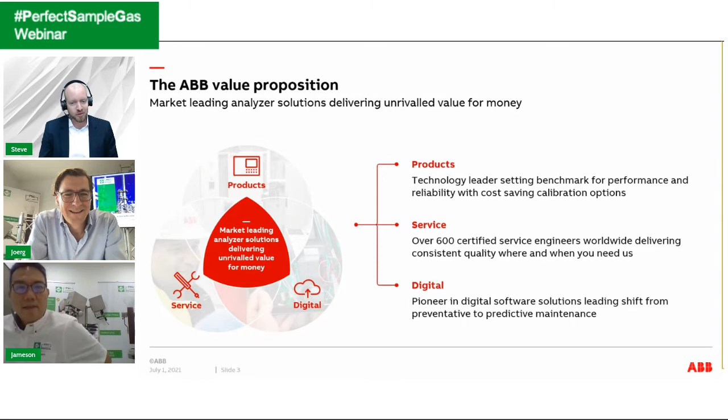But today we're going to focus more on the products and then show you a little bit on the digital solutions. And I think we've got a demonstration for you as well. So I'm really looking forward to share that with you. Let me take you through some of the portfolio here. So obviously from your side, you would look at an application and you'd say, okay, we need to measure these components. So we look at that, and we then take a sort of shopping cart of different measuring principles to match that up with your application.

And we have the benefit that we can pull from a very wide portfolio of all the different measuring principles that you can see. We also have GCs that are not mentioned here as well. That's one way of looking at the application. The other way that you can look at it is to say which analyzer modules are needed to suit the different applications. And if I look at our continuous gas analyzer series, you can see that this goes back many years, back to the 1920s.

So the first thermal conductivity based analyzer, the Caldos, was invented by Hartmann and Braun years and years ago for combustion processes. The Uras was actually developed by BASF here in Germany, and it was licensed to Hartmann and Braun back in the 30s, and we productized that and started selling it commercially in the 50s, and that's still our biggest selling product. It's a very well-known name in the industry. And then the other measuring principles you can see there as well: paramagnetic oxygen, you'll see a little bit on that later on, flame ionization, UV, electrochemical, zirconia. And so that's really for us the foundation for all of our continuous gas analyzers.

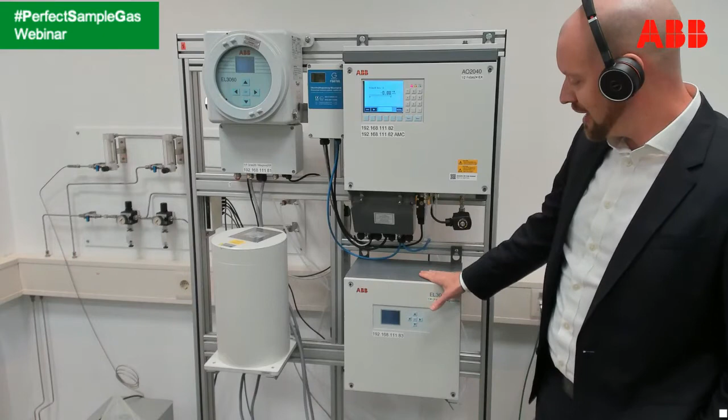Yeah. Interesting. Okay. And then the other one here is the EL3040. I'll just very quickly open that box so that you can see. So this is for general purpose, but very compact. This is the Uras 26 photometer, and then you also have under here a paramagnetic oxygen detector, so that shows you the combination of the two.

And then again, the same electronics, but underneath here you have a connection box which allows this to go into an IP65 environment. So you could install this outside. It's a stainless steel box, very robust, and that often for customers is very useful.

Yeah, good. Sounds interesting. I'm going to make my way back over there. See you in just a second. Okay. Wow. Hopefully he will make it. Oh yeah, that's great. Impressive. There he's back. There you go.

So, Steve, let me ask you. These are new products you are releasing now. Do you also see a trend that there are more hazardous area measurements? We saw this in our product development. We released this new ATEX probe. And it's a little bit the feeling that the measurements in hazardous areas are growing. I think in general, yes.

So maybe historically you could move the analyzer systems into a safe area, but then you compromise on the speed of the measurement. So more and more we're seeing the devices moving closer to the measuring point, and there you obviously get more into the hazardous areas, zone 2, zone 1, and that's why there is increasing demand. But I think there's also obviously a growing safety focus. And then there's more need to control the processes as well. So that's another reason why you would see an increase in demand.

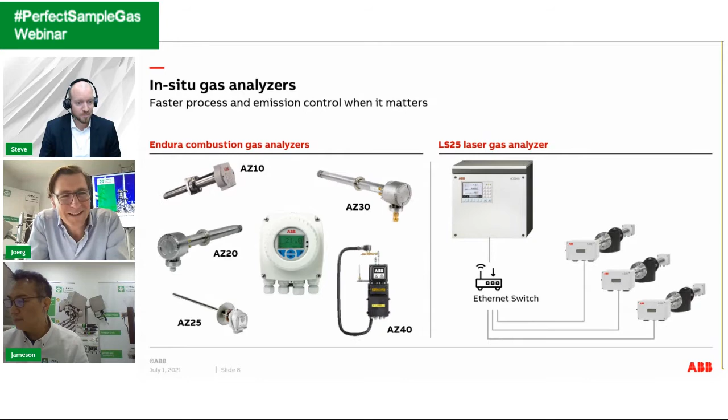Good. Then I would move on to newest developments. And here we have a couple of things to talk about. The first one is, you asked me in the preparation what kind of innovations are taking place in measuring technologies. And here I would share the example of our Magnos 28. It's a fairly new product. We launched it in 2016, and it's using the well-known paramagnetic principle, measuring oxygen. This measuring principle has stayed unchanged for 60 or 70 years.

And we said, come on, we need to move this to the 21st century. So our vision for the Magnos 28 was to replace this glass and all of the circuitry, there's a mirror on there as well, but also then to automate the manufacturing. So that micro wing is positioned on the wire. It's bonded to the wire, and then there are these little hooks on the side that it's also bonded to. And that then is the complete sensor. I'm not sure how well you can see this. That is the sensor in a little plexiglass model.

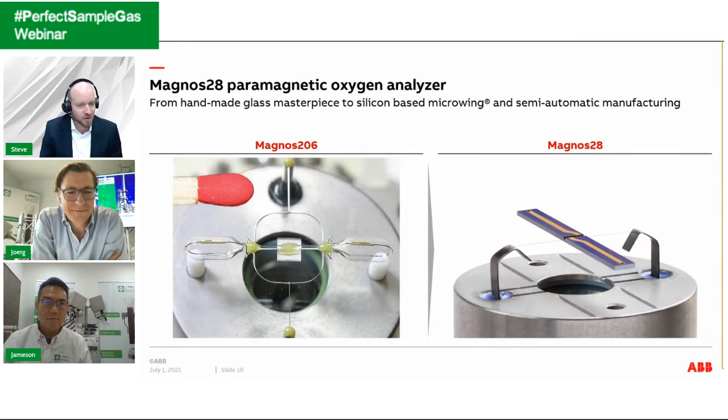But we're really excited about that, and the reason it's so important is because every single sensor is the same, which means that when you get into very critical applications, very low concentrations or high concentrations, you get much better repeatability and precision on the measurement. Okay, interesting. Good. So that's the Magnos 28. I'll keep moving for the sake of time.

The other area that you asked me to talk about was emissions and what's happening in terms of emission limit values in different industries. And I think the one that's most prominent is the BATC for waste incineration. This will come into law effectively in 2023, lowering the emission limit values for all waste incinerators or waste burning processes. So it could also apply to the cement industry, for example, if they're burning alternative fuels.

of the measuring components. And the good news there is that ABB has already tested one of our ACF 5000 systems on a plant in Germany, in Ulm, and passed the QAL 2 evaluation with these lower emission limit values. We're very proud of that, and it shows that it is possible to measure down at those limits. The next step, of course, would be to certify the system for those limits, and that's something that we're working on.

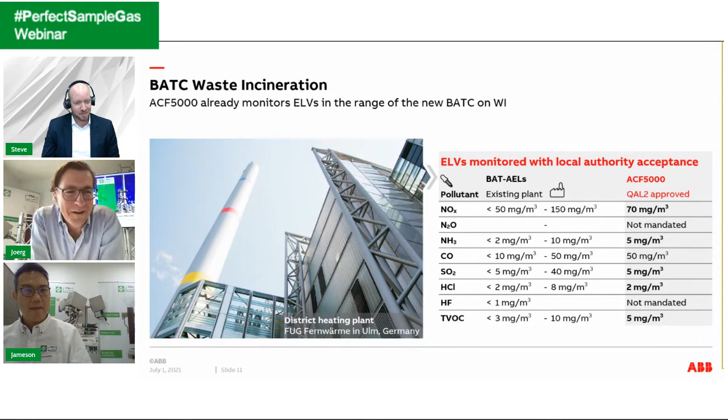So the last one in this section would be a quick intro to the digital offering. I'm going to do a demonstration in a minute for the dynamic QR codes, so I won't explain those in too much detail. Really what we've got here is the ability to easily transfer all the relevant diagnostic information manually.

But like I said, you'll see that in just a second. So Simon is here getting ready with the demonstration. The next one here is condition monitoring. So that takes the same diagnostic information and brings continuous monitoring to it. So we continuously track all of these different parameters and generate health check reports for our customers so that they can keep up with the health of their system.

And particularly in these lockdown periods, remote insights has been extremely useful. So remote support is quite common nowadays, being able to dial into the system and see what the customer's seeing, but you couldn't physically see the plant, you couldn't physically see the system, so you're a little bit limited. So what this does, this is a two-way video app, which allows us to sit in our factory or even at home, it doesn't matter, with the plant.

So they would carry a smartphone or a tablet or maybe even a headset, look at the system. We see exactly what they see, and then we can overlay instructions to them and talk through those instructions as they're working through it. So that's been really, really useful. We were quite lucky, I would say, that we had that solution about ready before the first lockdowns came.

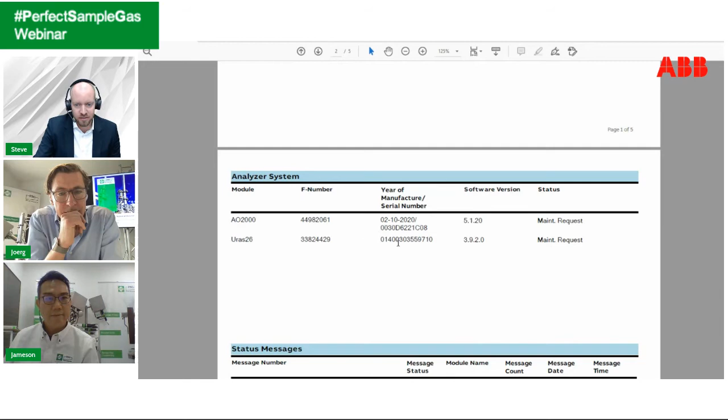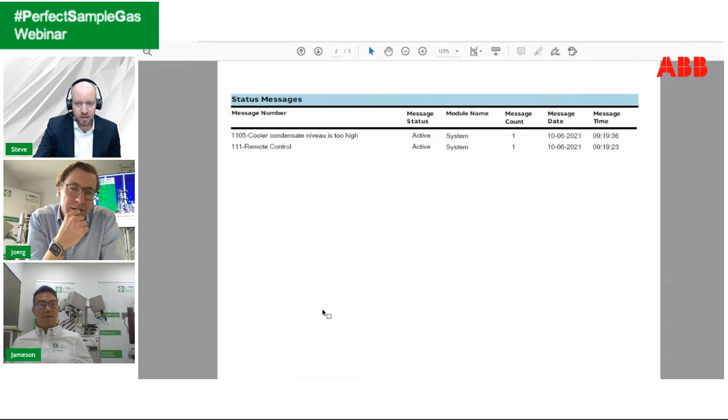It tells us that we have an AO2000 system with a Uras26 analyzer with the different software versions. You see there, for example, that the cooler condensate level is too high. So that comes from one of the status signals. It shows that we're in remote control status. You've got all the different I/O modules, the number of I/O modules. You've got the cooler temperature here, which is very useful.

Yeah. This is so interesting, especially the information from the conditioning system. I noticed now in China, there are regions where the authorities request not just the emission value from the system, but also information about the sample handling system. And it's interesting to see that this is logged there. It's very valid, very important information, right? It's hugely important, and for years we've had the approach that we need to have the data from the sample handling as well.

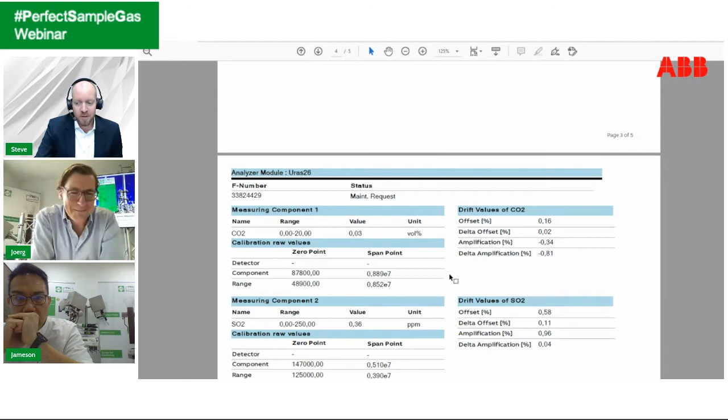So we have this CAN bus network that we build into all of the analyzer systems that takes the signals from the sample handling components into the analyzer. And that's how we can get all this diagnostic information through the QR code from the display itself. Oh my gosh, yeah. I think we have to look at the time a little bit, but it's just super exciting to see.

Yeah, so you can see with one shot, you've got all the relevant diagnostic information, and that really speeds up the whole fault finding, troubleshooting process. And even if you don't have a smartphone, you can take a picture with anything and just send us the raw picture. That also works. Then we can decode it on our end. So this is hugely exciting.

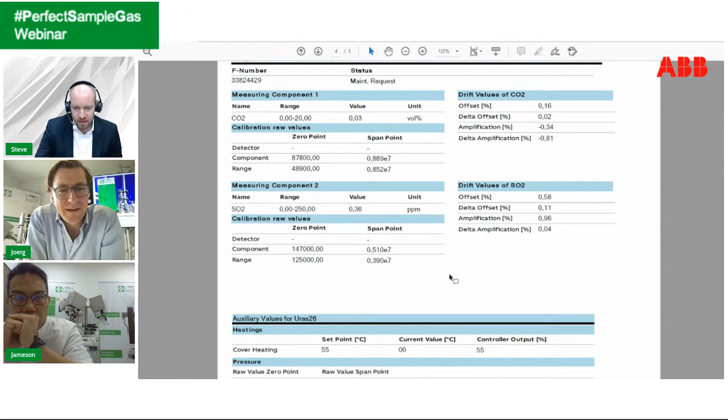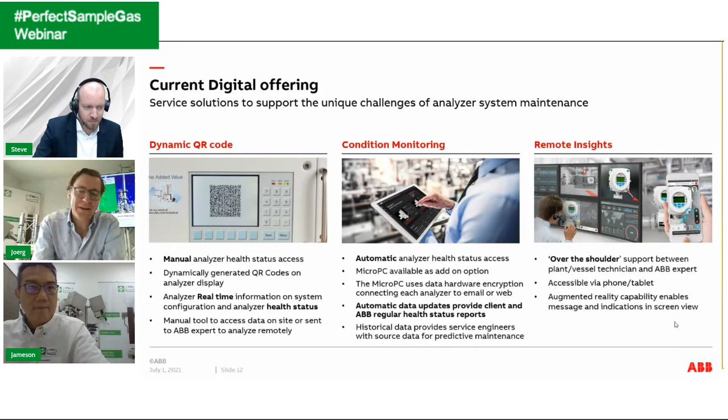What I would do now is come back to the presentation. And like you said, we need to be aware of the time here. And I would like to see you all as well. Good. It's always super interesting. When you jump into one topic, you think, wow, we could talk just one hour about this, but yeah, okay. One hour is quite tight. It's a lot to cover, I know that.

So let's move to sample handling, which I know is a topic close to your heart, and also for the audience here. So I'll give you a bit of an insight into how ABB looks at sample handling. This is a typical cold-dry extractive system. Not sure if you can see my mouse. So the probe, the filter unit, the heated sample line, then you come into a valve or valves for calibration, the cooler, which is a key component of the system, with the peristaltic pump for draining that moisture off.

Maybe an acid filter here if you have any aerosols that are getting through the system. That's an extra protection. Flow meter and a pump for transporting that gas, and then the final protection before the analyzer is a condensate monitor. And we quite often put another additional filter on before the analyzer.

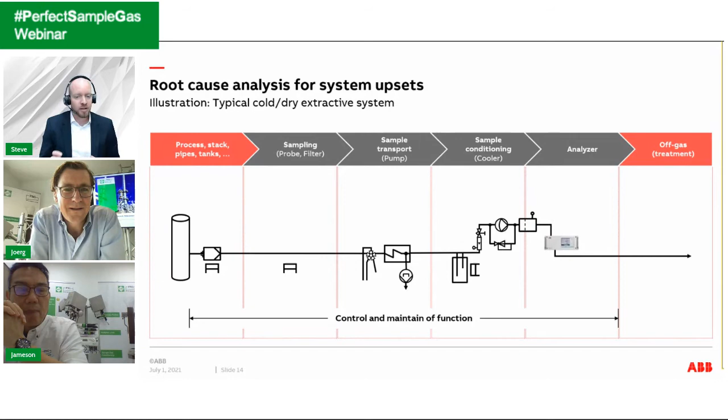What's really interesting here is we did a study a number of years ago looking into the typical failures of a cold-dry extractive system. We spoke to a lot of customers who helped us to gather data on that. And we learned 70% of all the upsets in the analyzer system are coming from the sample handling system. Of course, that doesn't mean that these components are not reliable and keep failing. It's not that at all. It's because the system is not designed correctly from the beginning, or the maintenance is not performed correctly. So that's important to mention.

And then when it comes to the analyzer, go ahead, Jörg. No, really, Steve, that's great to have this number here. I remember I saw this the first time, I think in India, when your colleague did a presentation and he shared these numbers, and I was really, wow.

This really outlines the relevancy, right? And I think, thank you for sharing this. It's interesting. Yeah, and then on the analyzer themselves, 25% of the failures would come from the detector. So that could be optical components, it could be contamination in the cell. And then only 5% of the failures that you typically see are to do with the electronics. It's really important to keep that in mind, and then also take seriously the design of the overall solution.

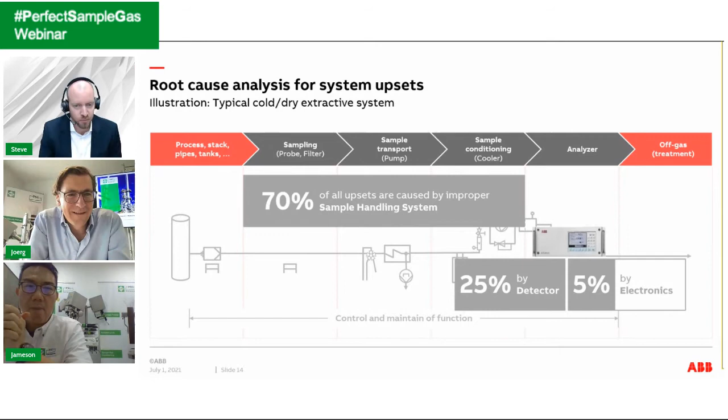Right, yeah. And for this reason, we also at ABB take it one step further in that we offer a pretty complete lineup of sample handling components. So on the probes, we have unheated probes, different grades of steel. We have a ceramic version as well. The heated probe, if you need to make sure that you're transporting that gas in the same condition. That's the probe 42. We have a number of filter units. Actually, I want to show you one of those in a minute, briefly.

Different types of heated sample line with self-regulated fixed resistor heating, cooler feed unit, thermoelectric type coolers, and then we also have the SCCS, which is a Peltier cooler, but a fully contained conditioning unit. And then on top of that, we have NOx converters, a utility unit for power distribution, and a number of other accessories.

Yeah, Steve, let me ask you. That's what you said in the slide before. You said it's not because of the reliability of the components, but very often, and I think, Jameson, this is something you must celebrate, because that's what you always say. You say you cannot copy and paste a system. If a system works fine in this application, you might need to choose other components, right? So, Steve, is that the reason why you have a selection of different types here?

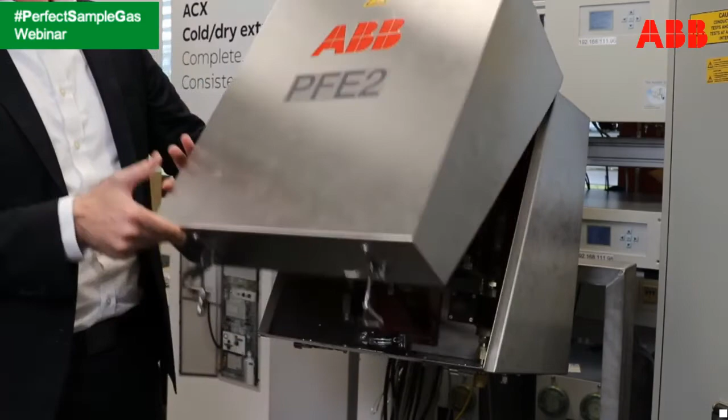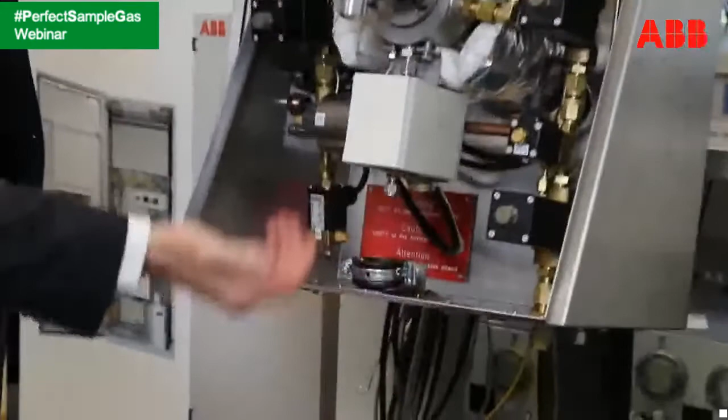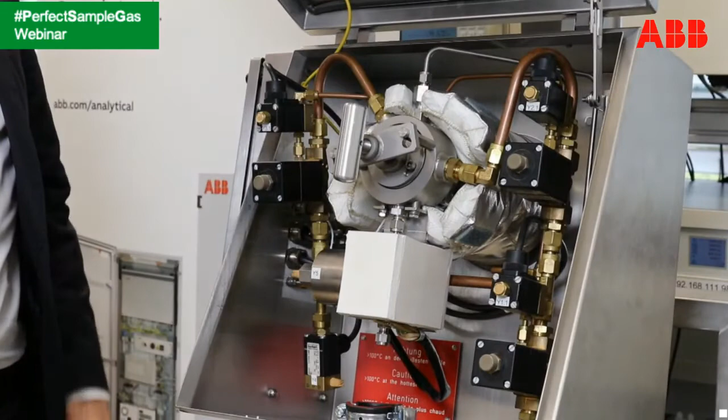So this is the inside. You can see a big heavy duty stainless steel box. The sample line comes in from underneath and connects to this valve here, coming into the filter unit. I won't demonstrate that now, but it's very easy to turn this and pull the filter element out for cleaning or for replacement. And then what you have around here is the back purging system.

So very heavy duty pipes, which means you have a lot of power there for the purging, and you can purge from the inside and also the outside of the filter to make sure that it's really clean. I won't say too much more about that. If you guys would like to comment, feel free, but I'll make my way back to the other screen.

Yeah, I think it's just very nice to see. There are some things we heard from you now which we always say. It's important, especially the probe and the primary filter unit, because it seems like the philosophy is a little bit similar: everything you don't need in your sample handling system remains outside, with very efficient filtration and also low maintenance, which is what I understood from the back purging. And I think it's interesting to see.

Absolutely, and we like this concept very much with the heavy duty back purging. We don't see any other solution out there that's quite as robust and suitable for those challenging applications. But at the same time, a little bit comparable to the concept of Advance Optima and EasyLine, you also have different options there, right?

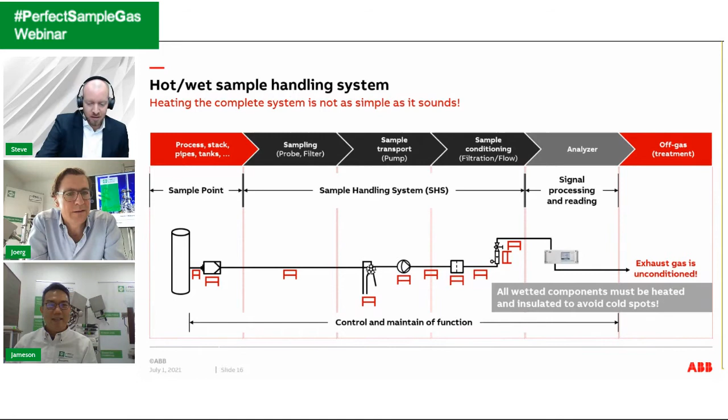Steve? Exactly. So the keys for designing the system are, of course, making sure the temperature is maintained. But the art form, if you like, is to limit the number of connections between the different components of the system, make sure the distances between those components are minimized, and take a lot of care about any parts in the system that are going to wear, because you're at a much higher temperature. So diaphragms and O-rings, you need to carefully select the materials there.

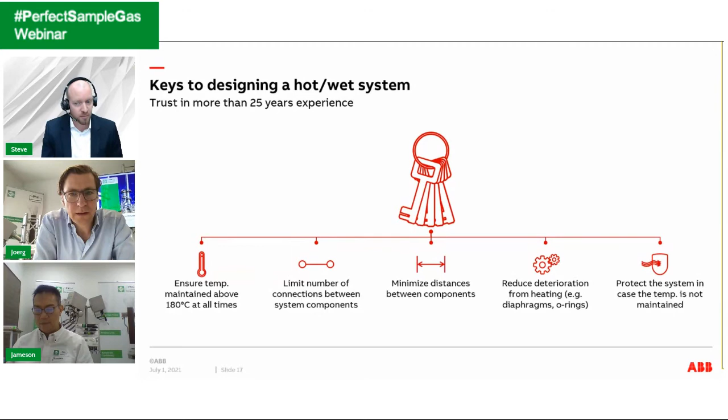And if for whatever reason the system is not maintaining that temperature, you have a risk that you put an unconditioned sample all the way through to the analyzer. So you need some protection measures in place to make sure the analyzer is protected if the temperature is not maintained. So the ABB solution, this is an example from the ACF 5000. I won't talk you through all the details, but that's the schematic.

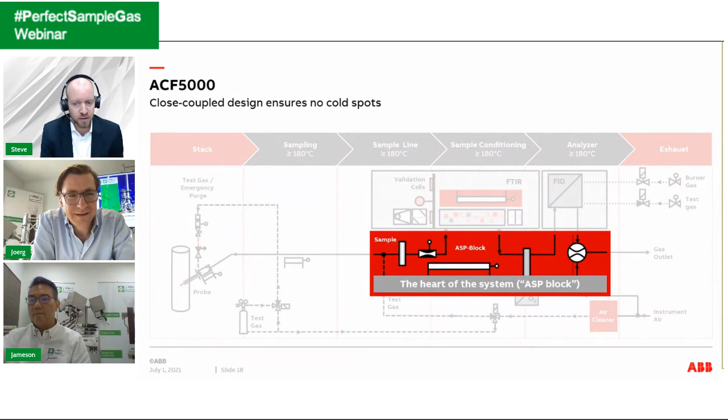The heart of this system is what we call the ASP block, which is an aspirator block. In there you have an injector or an eductor, so there are no moving parts. We use instrument air to create a vacuum and pull the gas through. This whole block is machined out of one piece of metal. A lot of engineering involved. And that's really the key to making a hot wet system simple, but also reliable.

Right, I got it. So the first part, probe, heated line, and then you have the direct connection into the ASP block, and then you've got a filter here, flow control. You've got the zirconia cell, the FTIR, and the FID. So in the end, it's very simple, but it's not simple to realize. Of course, you have to put a lot of thought into that.

Yeah, and I think it's also interesting, because you are delivering these systems worldwide, right? Exactly. So you have a temperature range from, I don't know, -20 up to +50 where it's very hot. These analyzer solutions are super complicated, but you also always have to face the environmental conditions, and it can be tough not to get too high a temperature, because with the 180 degrees C heating you mentioned, Steve, some components are already coming closer to the limit, right? So that's a challenge. It certainly is.

Good. So you mentioned before different solutions for different applications. These are the 3 standard system solutions that ABB offers. One is the easy system. This is really for measuring CO and oxygen in crematoria or small boilers, that type of thing. So you can really simplify the sample conditioning down to standard components.

And this is a plug and play concept that ABB has, where you really just take these different modules and put them together. The AO2000 system in the middle there is more towards power plants, iron and steel, pulp and paper, and maybe certain applications in the chemical industry as well. And then ACF 5000 is the one that we just mentioned, which is for your waste burning processes, measuring a long list of components. And that's a hot wet system design.

That's the, what would you call it? That's the high-end solution, let's say. The multi-component, all-in-one, so to say. Exactly. For this type of measurements. Yeah, that's interesting to see. Thank you for sharing this.

I think what is super interesting, when we had the preparation here, and I think that's a topic which is touching our whole niche industry, is what will be future measurements? Because if you mention now, Steve, the easy system, for example, for small boilers, and then the AO2000 system, for example, for power plants, coal-fired power plants. We see the developments here in Germany, we see the developments in Europe, and we see that the decarbonization of the world is a big topic, right?

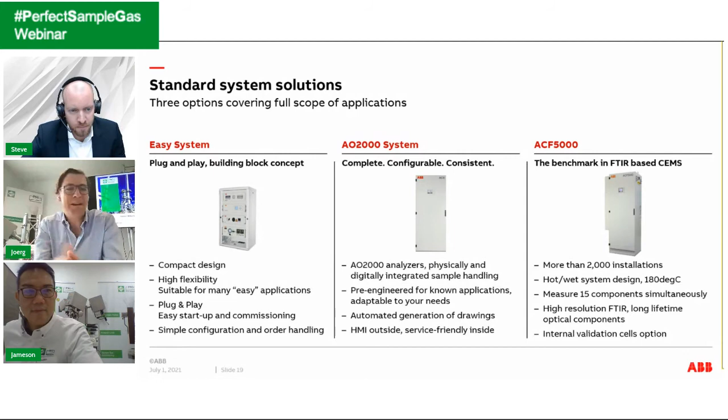Yeah, I think it's just super interesting to see that even in this industry there are new applications coming up, right? And it's never boring. Which is good. Keeps us busy.

Okay, again, Steve, I think we will not see your head. No, that's okay. I think you have to look at my legs, unfortunately. But let me just move over there. The resolution there is not great, but let's see. We get the idea.

I would then switch to the side view. Just give me 1 second. Simon, can you hit that one for me? I'm quite impressed how smooth that runs here. We have a little control panel.

That's interesting to see. So it's not just the requirement of the sample handling system at the same time. The sample handling system has to work on the ship, and obviously the analyzer, and all of this is combined in one system there, right? Yeah, and obviously the shipping industry is not used to analyzer systems, so making it as easy as possible for them is key. It basically tells you what needs to be done, and then you can easily transfer this diagnostic information back.

I think that was interesting in the preparation here, when we had the discussion about these shaker tests. Once I had the chance to attend one of these shaker tests, and it's just impressive how high the requirements are, right? But it's all about safety, and I think the numbers show also in other industries how important this is.

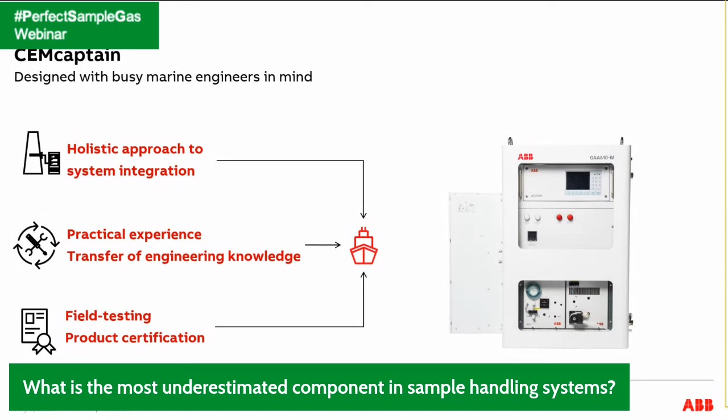Okay. I have one question here from the crowd. Mr. Bostan was so nice to ask this question: which is the most preferred for CEMS, hot wet or cold dry? That's a good question. I think you could look at it from a technical point of view, or also from a pricing point of view. And price, of course, is also an important topic.

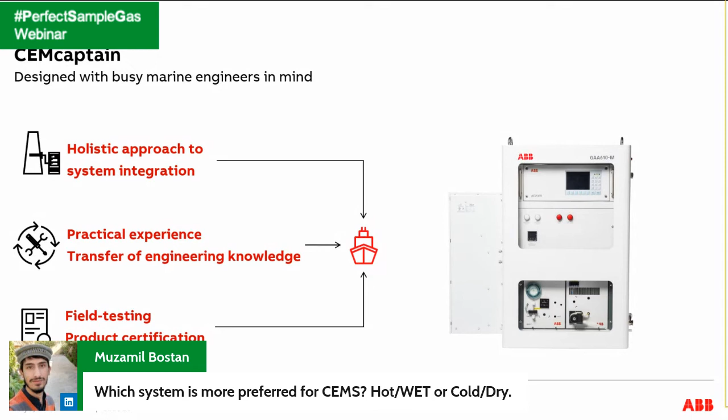So where possible, I would say cold dry is still the best choice. The real advantage there is that there's much more that the plant can do to maintain the system themselves, but also the price level for a cold dry system is lower than a hot wet solution. But if you need to measure reactive gases like HCl, HF, ammonia, or moisture as well, that's when you would move towards a hot wet system. Okay. Thank you for this. So we have another question from our question list.

Stephen, from your experience, what would you think is the most common mistake? So if people are watching here, what would you recommend to them? Yeah, I would think, well, to be honest, one of the things we see very often is that the overall cost of ownership of the system is not fully appreciated at the beginning. So the initial purchase decision is very often a cost-driven decision, but that can also mean that later on you suffer because of more maintenance required, failing components that end up costing you a lot more.

So that's a very common one, but of course also in the design of the sample handling system, like you said, Jörg and Jameson, the copy and paste approach often doesn't work, and you really need to make sure that the system is customized for that specific application.

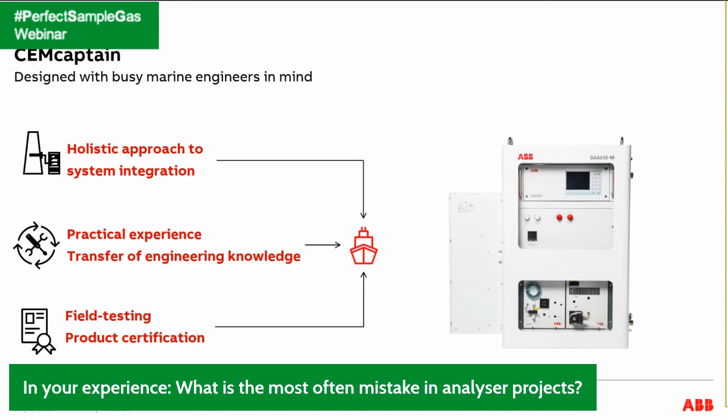Okay. And I think one is very clear, to select the wrong supplier is one of the most common mistakes. Okay, just kidding.

Okay, then let's have a look here. How do you see the future? Especially for us, it's a very important question as we produce sample handling components. It's a comparable question to hot-wet versus cold-dry: extractive analyzers versus in-situ measurements. Yeah, I think in-situ measurements have their place. If you're measuring a few components in harsh process conditions with high temperature, high pressure, corrosive gases, and maybe the speed of the measurement is very critical.

That's where in-situ fits. But if you need to measure multiple components, and you also need to perform maintenance on the system quite frequently, especially for emissions, where you have to calibrate or at least check the drift of the system regularly, that's where extractive for me is still going to remain the choice. And statistically, in 90+% of the cases extractive measurements are chosen exactly because it's so much easier to maintain them in a nice clean environment.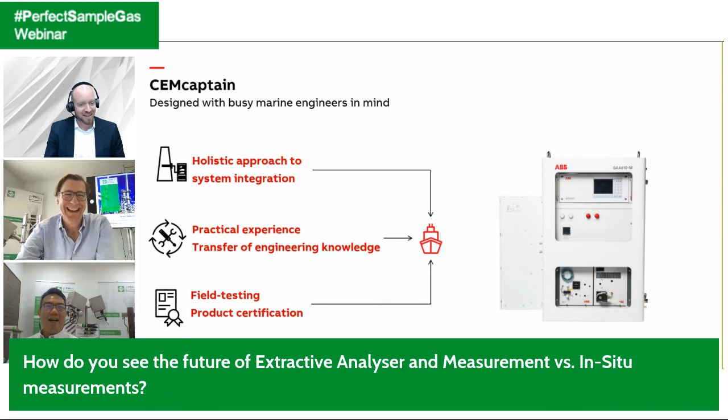Okay, Jameson, this is good news for us. No, okay.

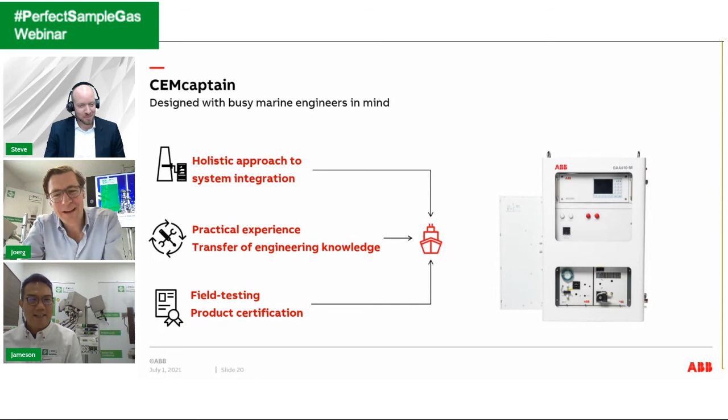All right, last question, Steve, and then really we should come to an end. I'd also like to have this point of view. Today we focused a lot on emission monitoring. We know that the world of emission monitoring and process measurements cannot be fully divided, right? But still, what is the ABB point of view on which role we can play to achieve the reduction of emissions?

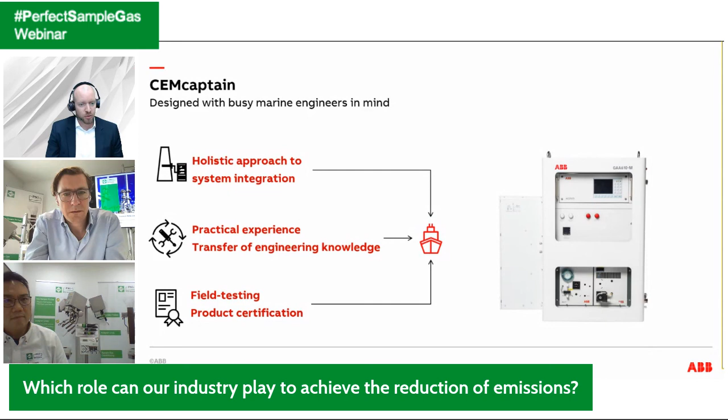What we're seeing right now is a massive shift in focus towards circular economies or sustainable operations. So how can you decarbonize industries that by the nature of the process produce quite a lot of CO2 emissions? There's a huge activity towards hydrogen, green hydrogen, electrolyzers powered by renewable energy. And also the importance of introducing oxygen into certain processes so that you have a much cleaner combustion and a much purer exhaust stream.

And analytical measurements are going to play a key role in controlling those processes, but also in helping industries like cement, iron and steel, and petrochemicals to decarbonize. So I see the role of gas analyzers as very important, and then there'll be the traditional measurements too. If you add, for example, carbon capture and storage to some of these processes, you'll see additional measuring points for analyzers that will be critical to control that process, and to make sure that what comes out is clean and safe for the environment. Yeah.

Thank you for sharing this. Okay. Wow. A lot to take in. Hopefully it wasn't too much for people. No, I don't think so. At least I can say we enjoyed this a lot, Steve, and I'm very thankful that we could invite you as our guest today. Just running through it, there are so many parts where I think we could have a whole webinar about a certain topic.